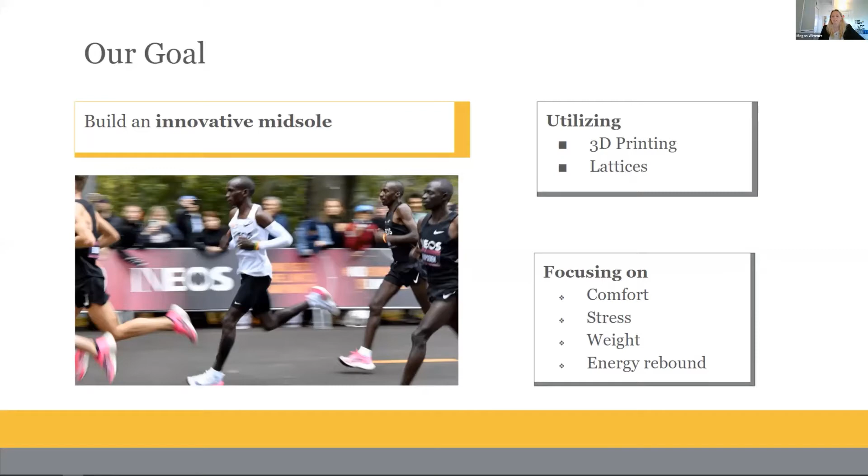Our goal for this project was to design and fabricate a 3D printed lattice midsole to be incorporated and tested in a running shoe, focusing on the heel strike running form to improve mechanical shoe performance through emphasis on comfort, stress, weight, and energy rebound, which is how much energy the shoe rebounds. You can think of this like the springiness of the shoe.

Our sponsor was Vibram Shoes. Vibram is chiefly known for their market-leading shoe soles and traction grip. They currently partner with companies to make trail running shoes and hiking shoes. The motivation for sponsoring us was to help develop road running shoes and to seek to learn about and utilize 3D printing processes.

So why did we utilize lattices and 3D printing in our project? Shoe performance traits that we were looking for were lightweight so the shoes decrease energy exertion of the runners, high energy rebound so the shoe increases a springiness factor to improve forward momentum, and finally, high strength in order for the shoe to take stresses caused by running.

Now we use 3D printing since the technique has unique customization for specific biomechanics and different styles to bring in customers. It can also produce unique lattice structures to produce distinct properties, and can also allow for rapid prototyping.

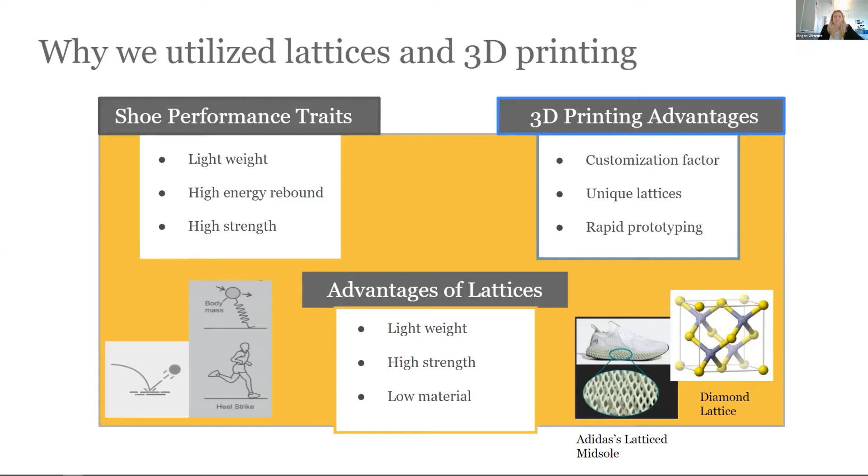So here's our project story. We researched what shoes are out there that use 3D printing, what materials are used in typical running shoes, and 3D printing technologies and materials that can be 3D printed. We made an initial computer model and completed a finite element analysis. We used all of what we learned to create our final model. We printed the parts, built our shoes, and finally tested our shoes. Throughout this presentation, we'll be taking you through this step-by-step journey.

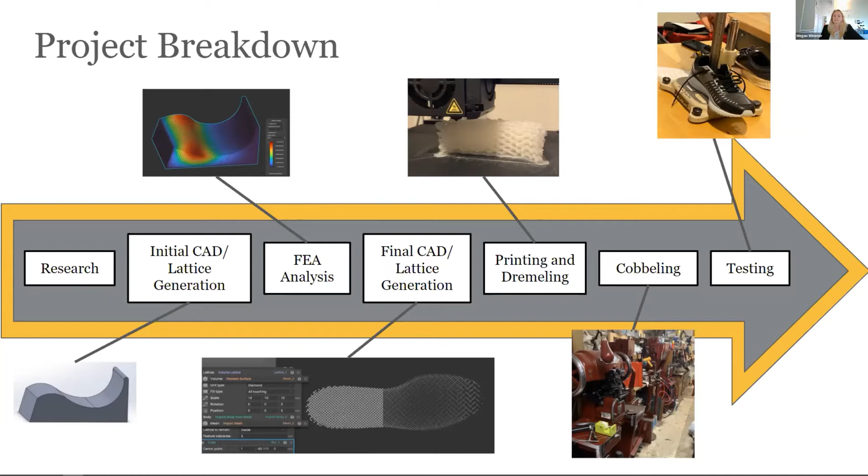Research is the first step in our design process. When looking at current 3D printed shoe technology, there are a few standouts in the market. Out of these four companies, the Adidas Futurecraft 4D and the New Balance DuraForm Flex are the most similar designs to our own, as they incorporate many of the same principles used in the lattices as we applied them in creating our own.

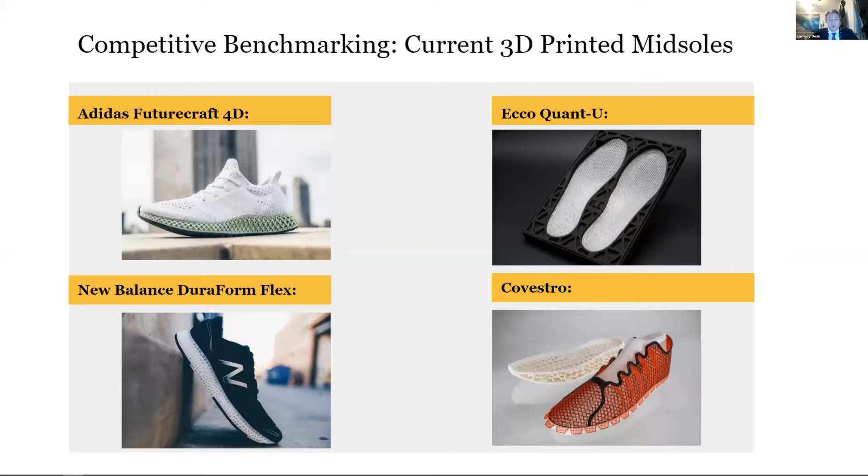Some current shoe midsole materials that are commonly used are TPU, EVA, and PU. We ended up choosing TPU due to the high rebound of the material, which again is that springiness of the shoe, the similarity to EVA foam, which is what is most commonly used in shoes now, and most importantly, we can 3D print this material.

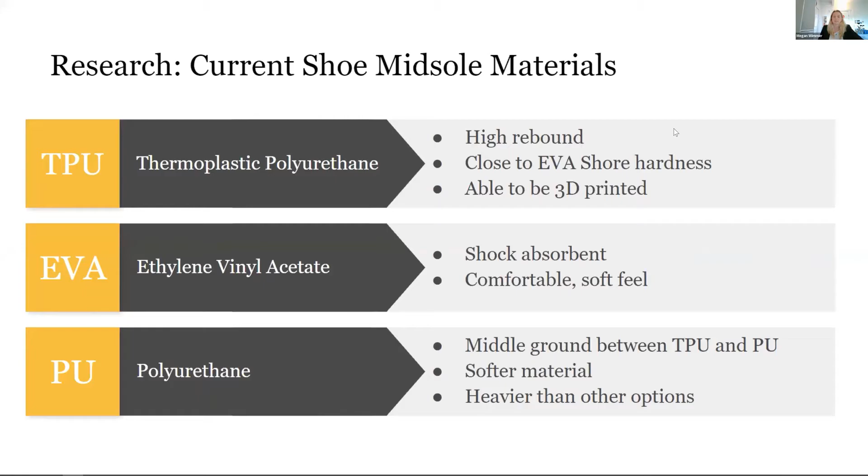As industry leaders have further developed technology, the 3D printing market has progressed beyond the original large, fully commercial machines to more affordable desktop-sized printers.

The 3D printing processes have also developed beyond the typical layer-by-layer extrusion of FDM, or fused deposition modeling. Unlike FDM printing, SLS, selective laser sintering, uses a laser to sinter a vat of powder and typically needs post-processing and expensive technologies. CLIP, continuous liquid interface production, is another method of 3D printing that uses photopolymerization across a resin, curing a liquid with UV light layer by layer. This process is extremely precise and can produce parts that are flexible, rubbery, and have strong tolerances. While this process has many benefits, the printers are expensive, upwards of $10,000, and have longer print times, which is why we decided to use FDM printing.

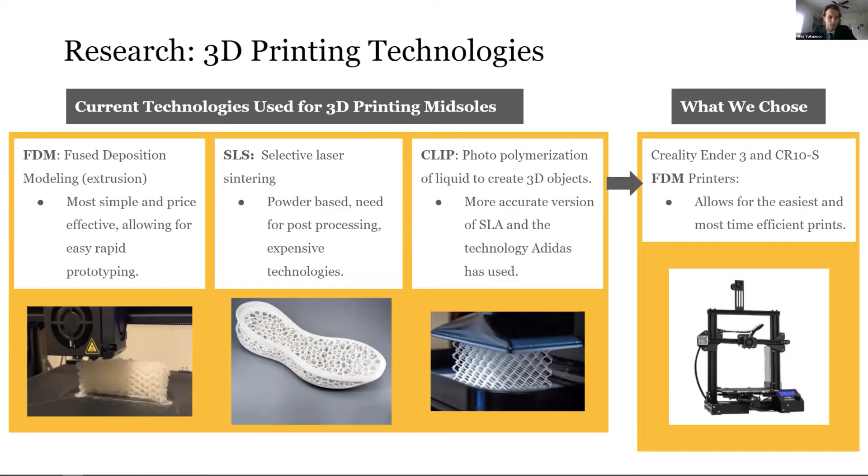We are lucky enough to have three FDM printers, gather free filaments, and easily rapid prototype in our apartments.

For our 3D printing materials, we started using the Formlabs Form 3 SLA printer with elastic resin due to the previous Capstone team's research, and found there are many limits to manufacturability and shore hardness.

Through research, we determined TPUs are printable on FDM printers and reached out to NinjaTek, a market leader in flexible filaments, for samples of their products. They were gracious to sponsor us with plenty of their NinjaFlex and Cheetah filaments for our project.

TPU allows us to achieve a shore hardness that is rigid in structure, but has enough elasticity when a force is applied to return to its original shape, while providing proper support necessary in a shoe.

Upon testing, we determined that the NinjaTek NinjaFlex TPU filament had limitations on shore hardness for ours and Vibram's applications. We determined that the NinjaTek Cheetah 95A filament was best fit for our shore hardness goals and needs for rapid prototyping.

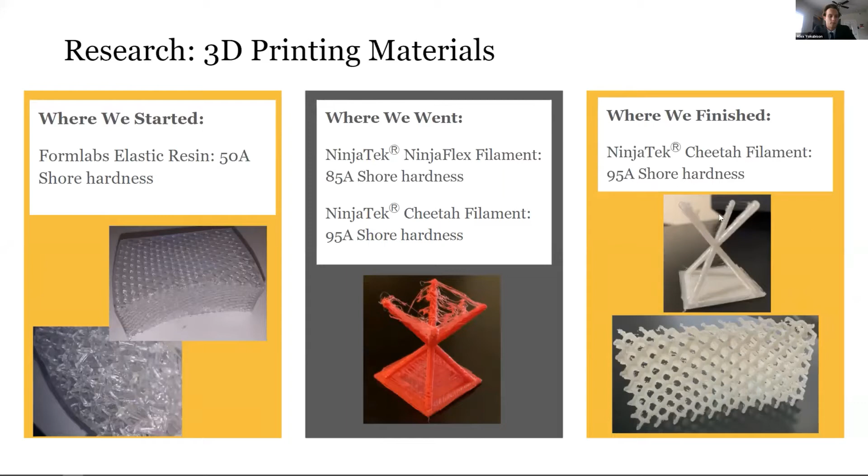Once we determined our material, we had to test it across many different slicer settings because TPUs are unlike typical FDM materials. In order to properly print the Cheetah TPU, some settings such as extruder temperature and retraction must be changed. Shown here are pictures of the test prints that we used to find the best way to print lattices.

Since we are printing a diamond lattice, a shape was used to mimic the overhangs and print angles that are present in a diamond lattice.

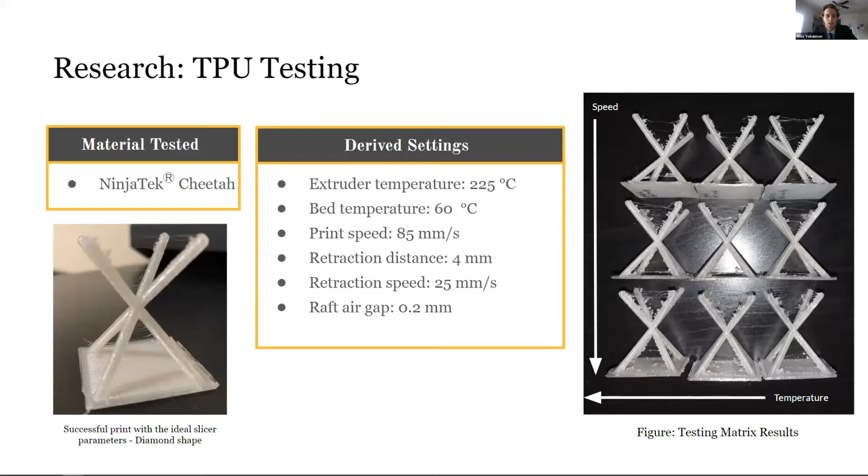The image on the right depicts a test matrix we ran, showing the increase of speed from top to bottom of the image, and the temperature from right to left. Lower temperatures and faster speeds reduce stringing the most.

The next step in our production timeline is the initial computer-aided design and the lattice generation, as well as creating a full finite element analysis of a modeled heel segment.

To properly start our lattice generation on an actual shoe, we first needed to see the areas in a shoe where the forces are highest.

We made a CAD model by measuring one of our feet because we did not have access to Vibram's CAD shoe model yet. To do this, we performed a full finite element analysis of a heel cup model that would be in a standard shoe.

Finite element analysis involves placing forces on a model and seeing how that model reacts. When studying a shoe, there are two ways to add forces: static and dynamic.

A static analysis of the shoe would involve studying the shoe's reaction to standing still in the shoe. As we can see on the left-hand side, the areas in red are areas of high stress on the shoe heel when a person is standing still.

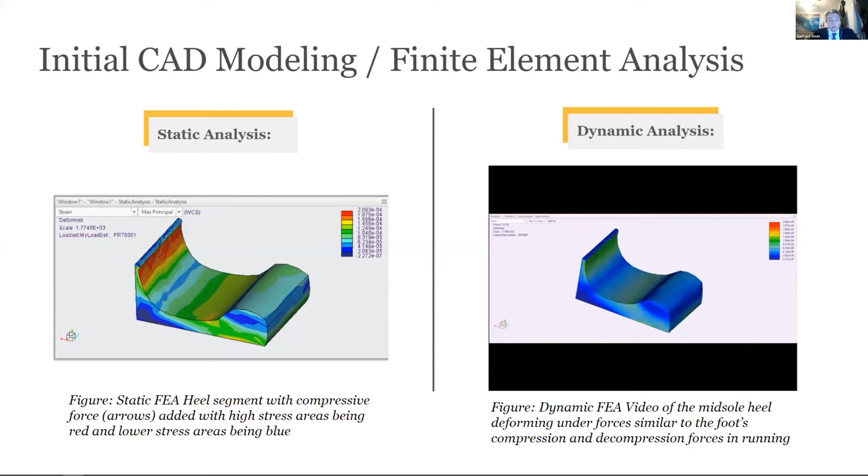Shown on the right is a video of the same heel undergoing dynamic forces. These are forces that change over time and would more closely mimic the forces the heel segment would be under if a person is walking or running. The video illustrates how a generic heel cup in a shoe may deform under the moving forces humans exert.

Once the FEA analysis is reviewed, final adjustments are made to the CAD models and the lattice structures.

To create the honeycomb-shaped lattices used in our project, a program called Ntopology, also known as NTOP, was used. NTOP is a software used to create lattices and other complex shapes. These pictures are snapshots taken from the NTOP software.

The top picture shows the CAD model heel segment before it is converted to the lattice shape shown in the bottom picture. By taking the CAD files given by Vibram, we were able to carve out certain sections of the fully latticed midsole. Specifically, we used NTOP to create a diamond lattice structure throughout the heel part of the midsole, shown in the bottom picture.

A diamond lattice shape was used because it avoids shear stresses. NTOP was further used to pull out sections of lattice from three different areas of the shoe to create our three other design iterations. Choosing the scale of our lattices is a crucial part of the process because it can greatly impact how the midsole moves. This is explained in more detail in later slides.

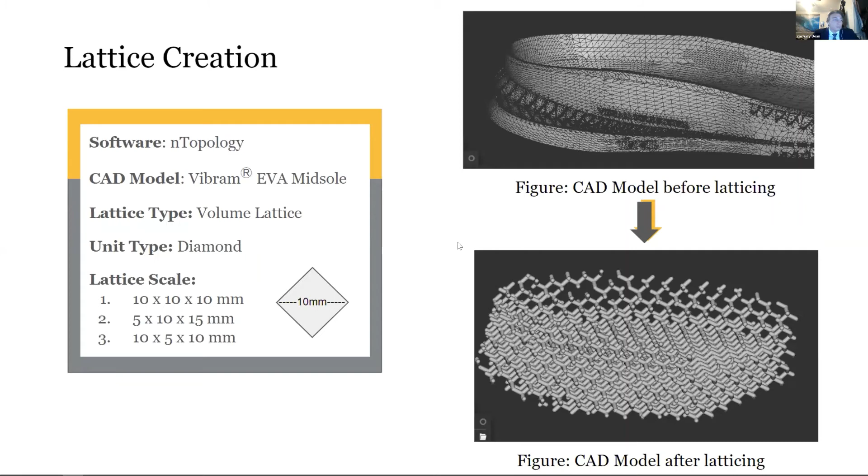Our next step of our process is printing our lattice pieces and dremeling out the existing Vibram midsoles. Here's an overview of the 2 approaches we took. We will explain more into what each name entails in the next few slides and show our printed parts. We used the Dremel tool to carve out the parts of the EVA Vibram midsole where we wanted to insert our 3D printed lattice parts.

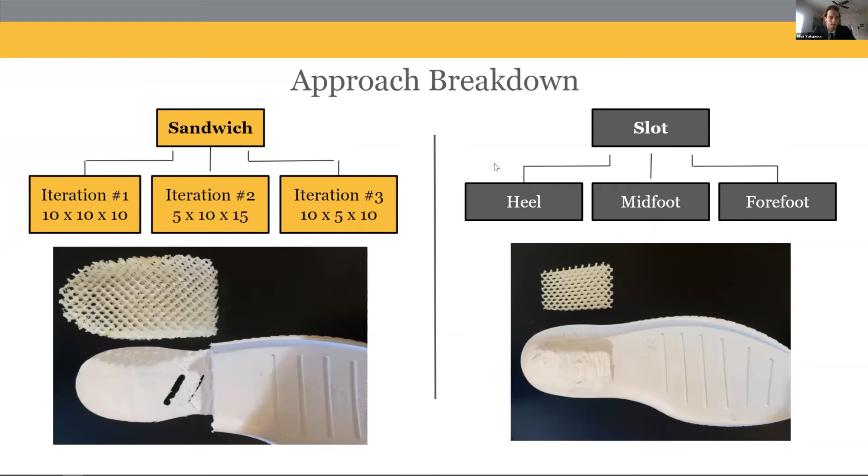Our first method was called the sandwich method. There are extensive print times of printing a full sole lattice with this material and print process, upwards of 2 days. The heel was latticed to focus on the heel strike running form. This yielded similar results by sandwiching our printed lattice piece between Vibram's insole and outsole. As stated previously, these are all diamond lattice shapes with a 2 millimeter branch thickness, which allows for the most fluctuation in lattice density designs.

This test method allowed for us to vary the honeycomb densities in the X, Y, and Z directions to compare and testing, as shown in the top right corner, meaning a lower integer value created more diamond shapes in a specific direction, while a higher integer value created a more spacious and therefore less dense lattice structure. Through rapid prototyping and feel of the lattice pieces bending on different axes, we assumed that the 10 by 5 by 10 millimeter lattice would perform best out of our 3 iterations.

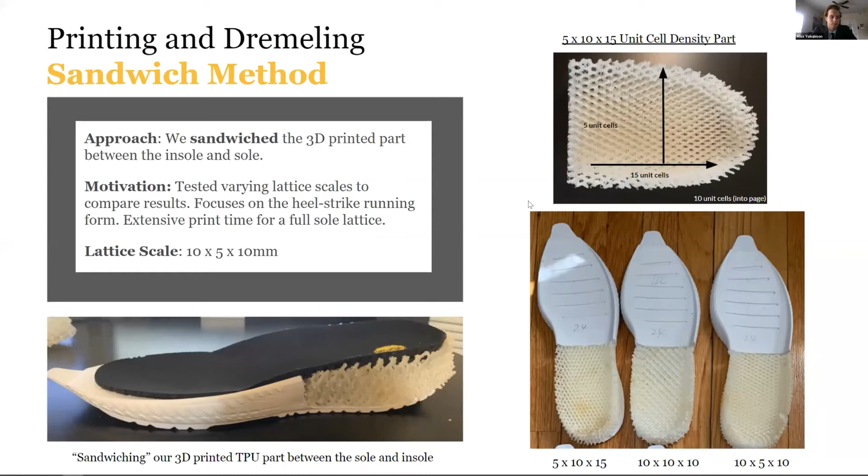Our second method is called the slot method. Latticing inner pieces of the midsole leads to material change while keeping the original midsole wall stability. We slotted our printed pieces into each midsole compartment, where we used a Dremel to carve away the area at each desired location. This approach allows for more targeted testing of the foot in the heel, midfoot, and toe box areas. All slot pieces have the same unit cell density, the 10 by 5 by 10 millimeter density as determined through our sandwich prototyping.

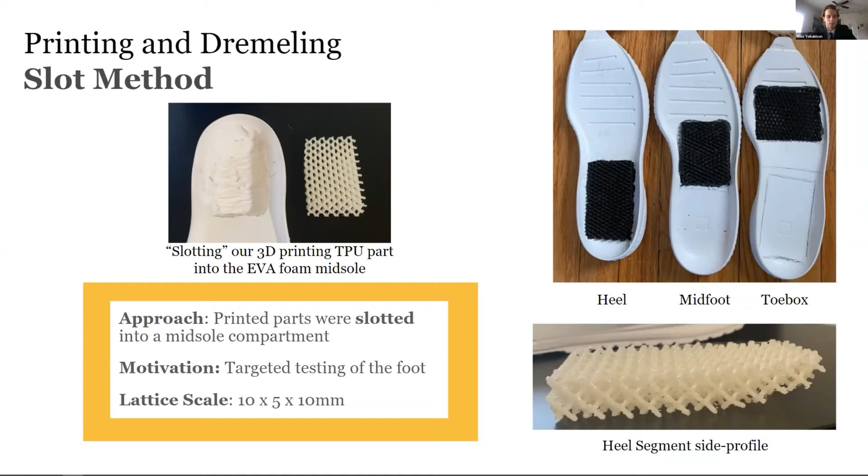Before our midsole can be tested, it must first be attached to an upper of a current shoe model. This is done through cobbling the 2 shoe pieces together. The cobbling process started by first using a Dremel tool to carve out all the areas where the lattices are to be placed. Next, the midsoles and their corresponding lattices are brought into the shop where they are paired with the upper portion of an existing shoe. Once the shoes are chosen, the cobbler will bond the 2 pieces together to create a functional shoe.

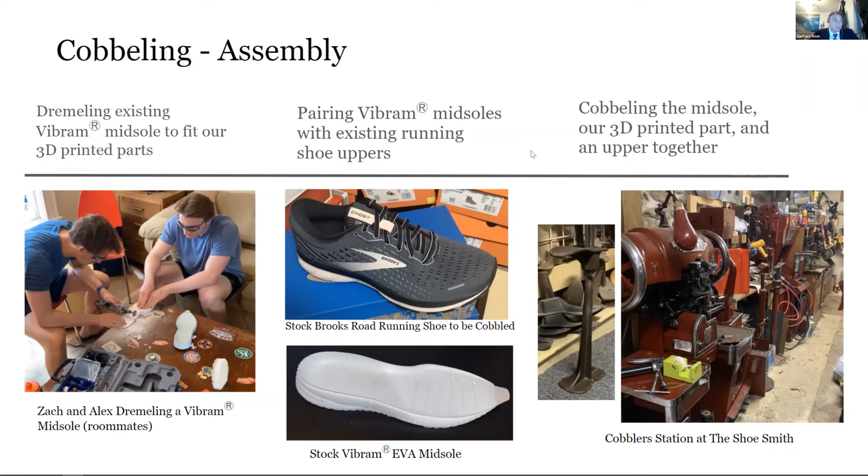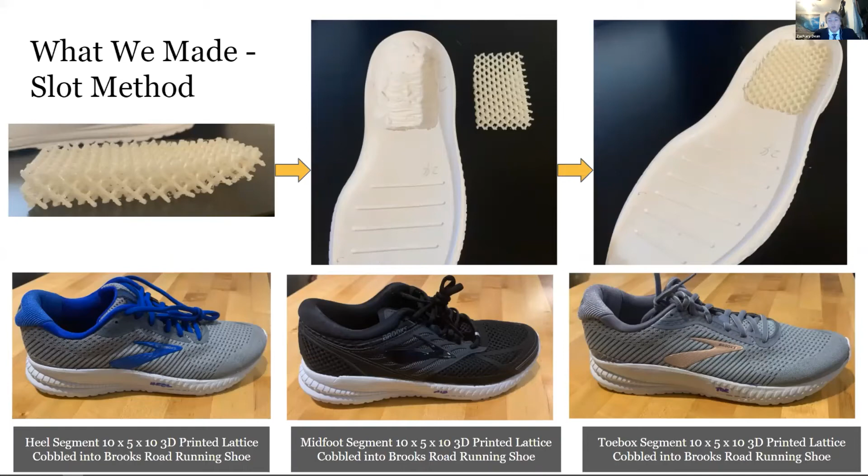It slides down the pole, hits the shoe midsole, and then bounces back up. The highest it bounces back up is the rebound value. There's value markings on the mechanism that show these values. For example, if the knob bounces all the way back up to the top when it was dropped, the shoe would have 100% rebound. Our 3D printed lattice shoes perform about the same as the current EVA Vibram shoe we use as a control group, with our 10-10-10 sandwich iteration performing the best, having a 42% rebound, which compared to the 45% rebound of the control shoe, we were very happy with.

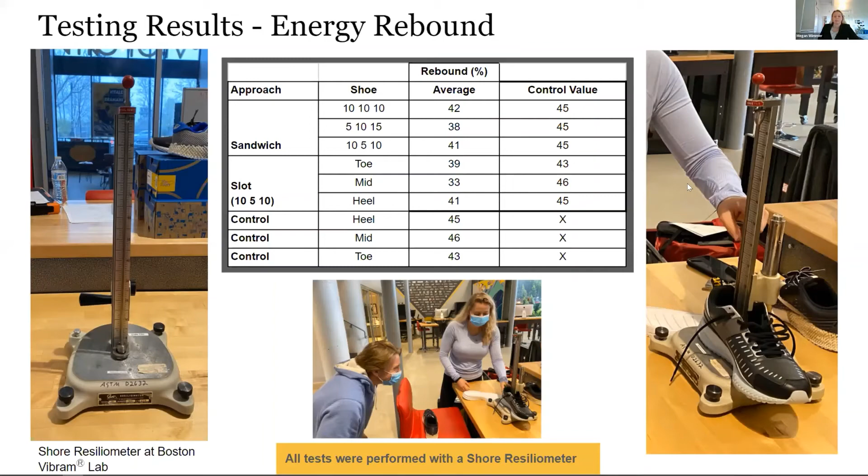We put on the shoes for short-term field testing. Usually this would be a long-term and survey-oriented process, but for the scope of our project, we put them on, ran, jumped, and walked, and compared how they felt to a control shoe.

For the slot approach, all ratings were based on flexion, stiffness, and comfort. The midfoot had more cushion than the control shoe and was supportive and the most comfortable—we rated this the highest. The heel slot was the stiffest of the three and rated second. The toe slot shoe was supportive, but we could feel the toe compress more when jumping. This was rated last.

For the sandwich approach, the 10 by 5 by 10 lattice density shoe was rated the highest due to its high cushion and flexion, and was more firm than the control. The 10 by 10 by 10 was softer and more comfortable than the control shoe, and compresses and flexes a lot, rated second because of comfort. Finally, the 5 by 10 by 15 shoe was harder than the control shoe, flexed less, but was rated last because it was less supportive.

Our final results showed that our entry into 3D printing midsoles was a success. Each iteration had a rebound slightly below the values recorded for the control shoe. The 10 by 10 by 10 iteration was the closest to the control, with a 42% rebound versus the control's 45% rebound. During the field test, our shoes proved to be comfortable, with the 10 by 10 by 10 iteration being the most pleasant underneath the foot when moving around. Along with the strength and lightweight aspects of using lattices, our goals of comfort, energy return, and stress reduction were all met as well. For future designs, a few modifications could have been made to create a higher functioning model.

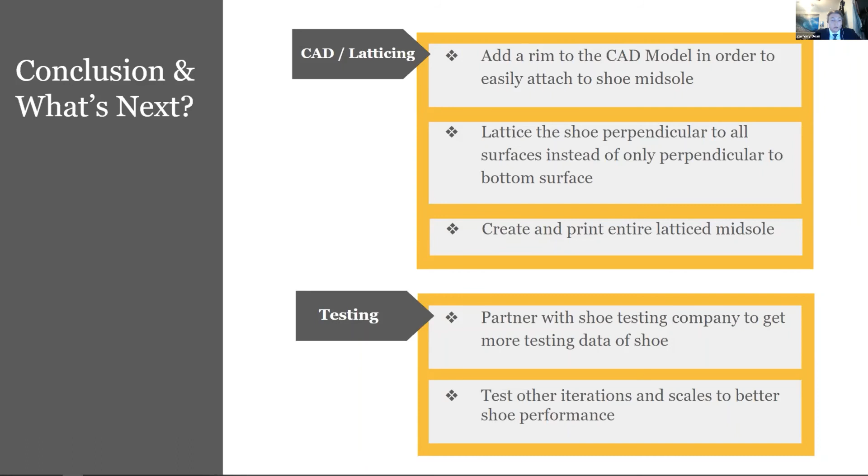A rim around the heel cup could have been added to increase the adhesion between the upper mesh and lattice surface. Furthermore, we would like to print the entire midsole since the printers used were not big enough, and the lattice may have also been modified so that it would be fully perpendicular to the profile of the midsole. Some additional tests may include more lattice scaling variations, as well as possibly being able to partner with a prominent shoe testing company to receive high-quality data.